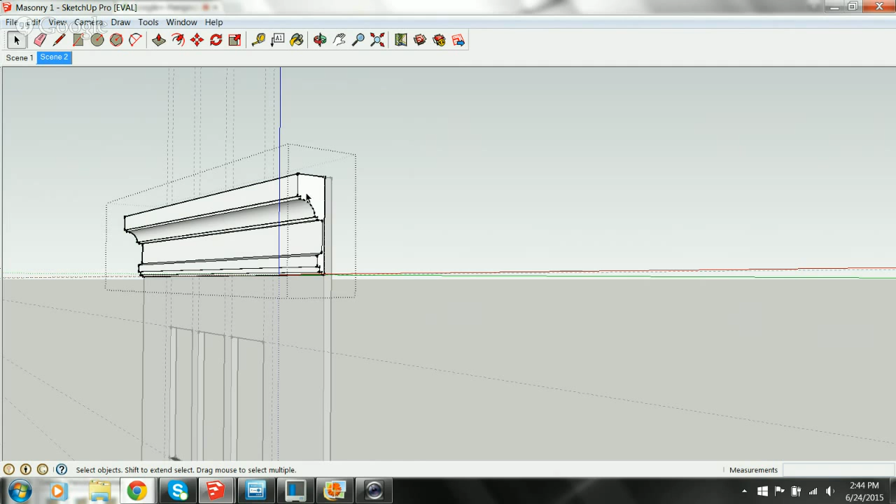All right, so we have the parapet piece that we based on this rudimentary profile I just threw together, kind of knowing what those dimensions would approximately be. Last time I was saying, look at the picture while I'm talking to you. Well, I'll keep the picture up, but it'll slide away when I jump back into SketchUp, and I'll keep bringing it back up as we point to things. Today what I thought we'd do is go into just our parapet piece and start looking at this.

We've got a whole row of what we call dentil molding. That's in here, that's a detail. We have these little decorative nubs that are details, and then we've got some recesses that are all details in here too. All of that is real simple and easy to model if you keep things within a simple geometry. Part of the layout with the dimensions helps us get that, and I like to keep things in dimensions of 4s if possible, most of the time.

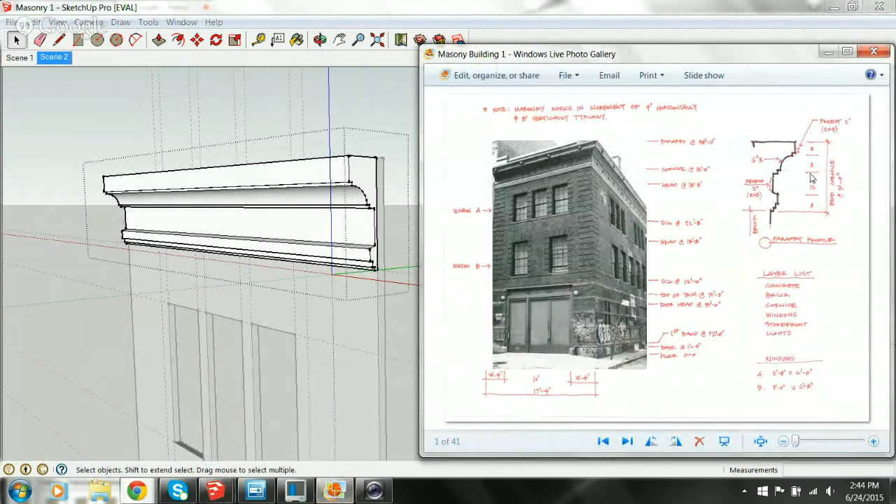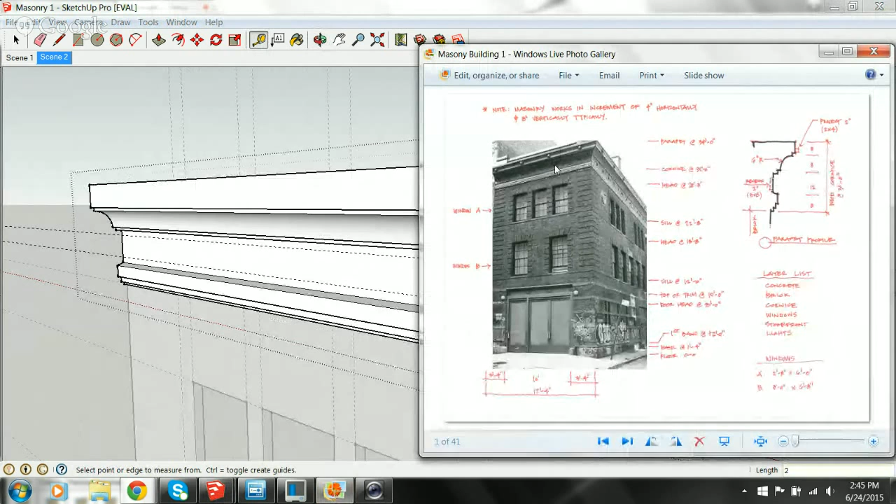Okay, so if I come over and I start, this was 1 foot is what we have to work with. So let's start with our recesses in here. I'm gonna grab that one and come off 2 inches, grab this one here, 2 inches. What I'm doing is setting a boundary around the outside of this particular level of the parapet to give me guidelines for these recesses.

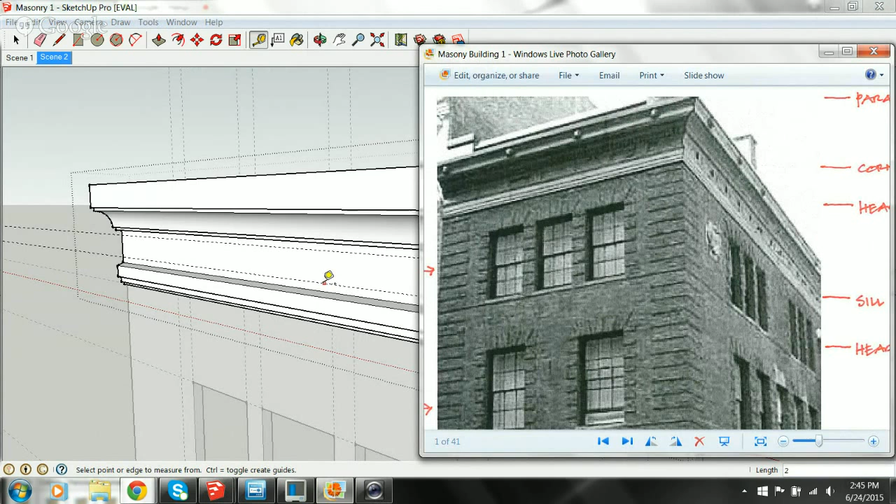So 2 inches there. We'll go ahead and just for right now, pull 2 inches off each side. Now I've got a boundary around the whole thing.

Okay, now I do have these lines down here. Remember how we laid all that out? And they were set dimensions. That was 4 feet, and let's see, these were 2'8". So I'm going to come over here, because I want some of these indentions to line up right on the centers of these. So 4 feet, 2'8".

Come on, grab it. Come on, grab it. Not going to do it for me. Why? There we go.

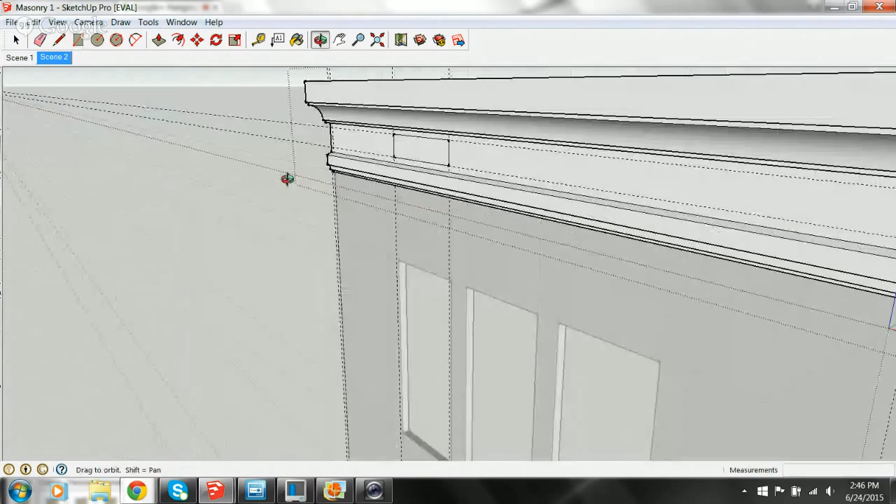Okay, and then I'm going to draw a rectangle in that. I'm just setting up construction lines for right now, I'm not doing any modeling or anything at this point. Okay, and now these were 8 inches. Oops. Oh, really? It is not.

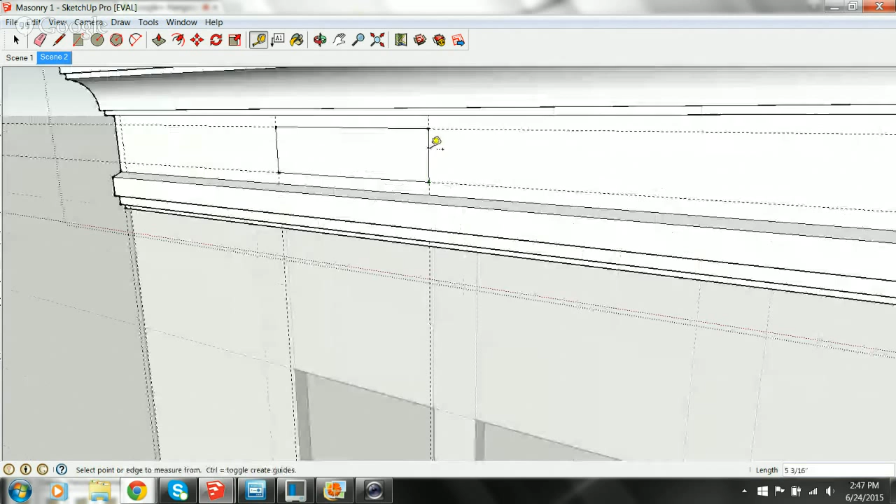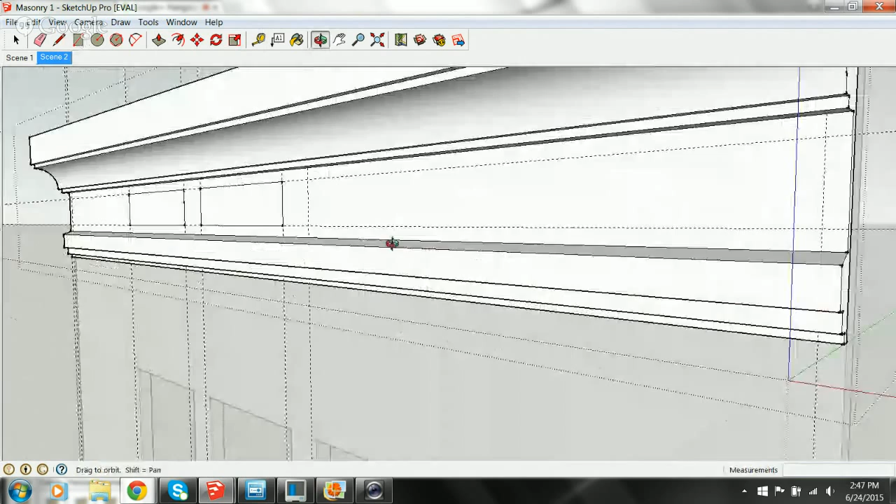So when you're grabbing these lines, you're punching in 8, and it's translating it to 8 inches. Yes, I forget I'm supposed to be providing instructional information as we go here. It's okay, these people are supposed to go through part 1, part 2, part 3.

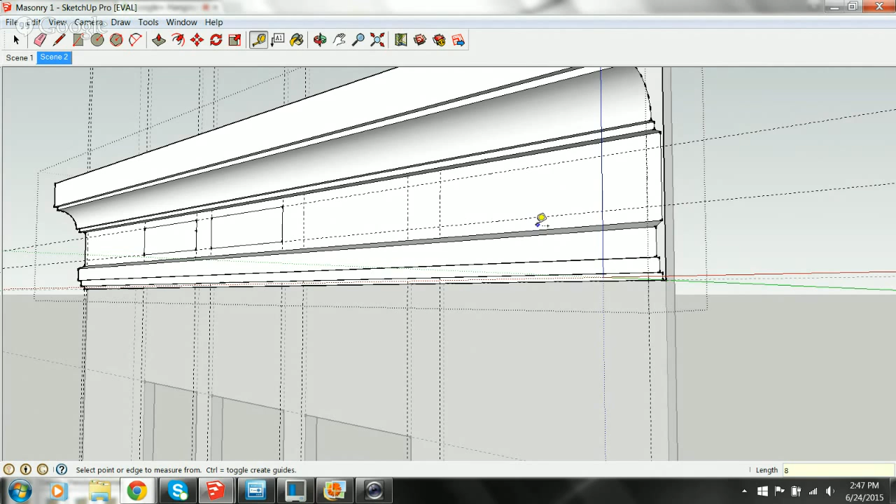What I'm doing is grabbing the line, and in the bottom right-hand corner you have the little length tab. I'm just typing it in because by default it automatically types in, and the default is inches. If you want, you can type like 1 foot, the foot sign, and the number of inches, but instead of 2'8", I'm just hitting 32 inches. Then I'm giving myself the guidelines to start setting all this stuff up. You put an extra 8 inches on the end.

Oh, I did, didn't I? So I just take that. That's why I have people watching as part of the instruction - when you catch the errors, that means I'm doing a great job providing instruction.

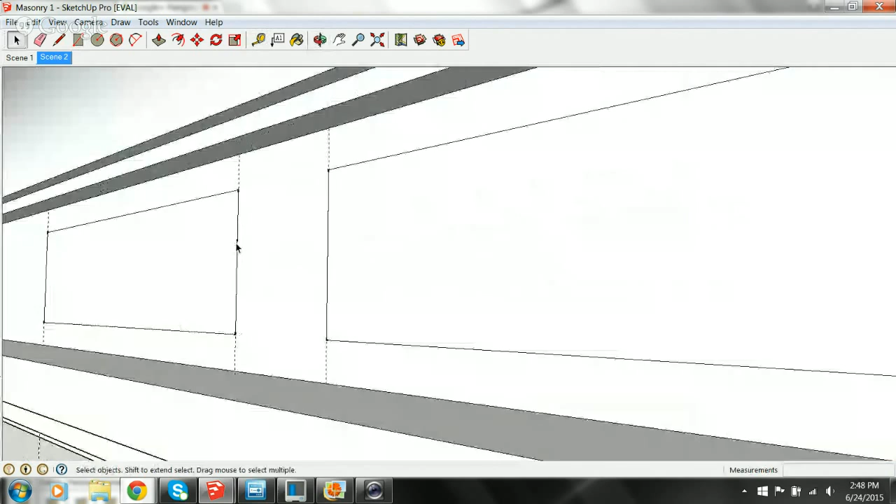How's that? Okay, so now I have 3 here, and I have 4 feet out here. Actually, if I offset that 8 and went 32, I'd be pretty close to having 5 equal. So I am going to go ahead and do that just for the sake of the construction lines, and then I'll know I have 5 equal.

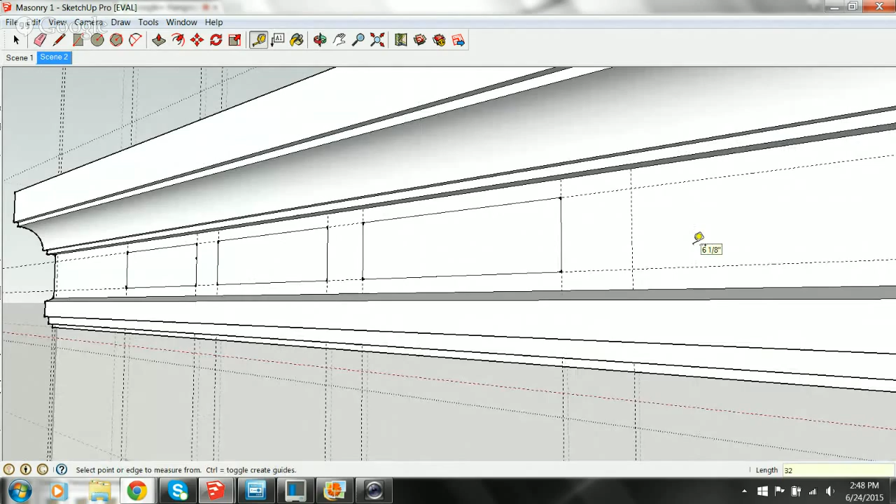It's really not wanting to grab these lines for me today. So there's that one - is it because the space is so short? No, I think it has to do with as soon as I draw an entity like a rectangle or a line, it doesn't want to grab from that line of a rectangle for some reason.

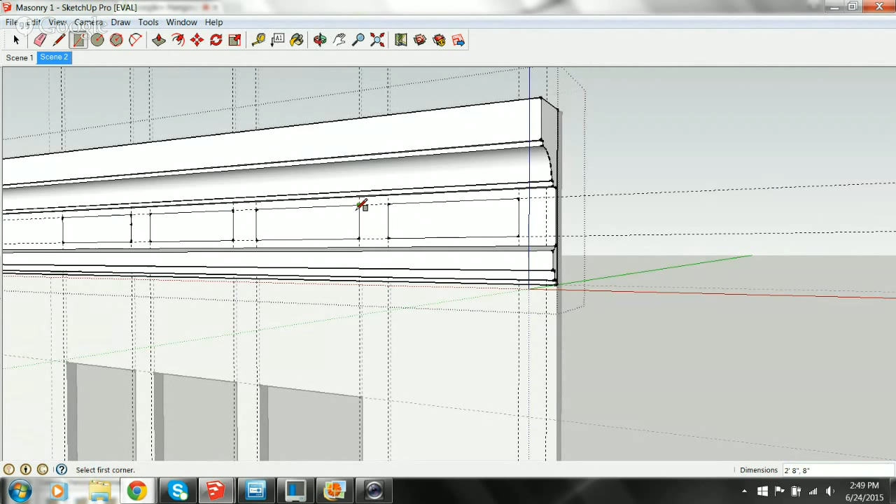If I hit right on a grip point like a midpoint or an end, I got to find the in-between, like that little red box, and then it tends to do a little bit better. So I'm using that tape measure toolbar just to grab it - I click on the line, hit the left button, and then drag it over. I type 8 inches. Okay, so I'm down here, little red box, click, type 32, rectangle button.

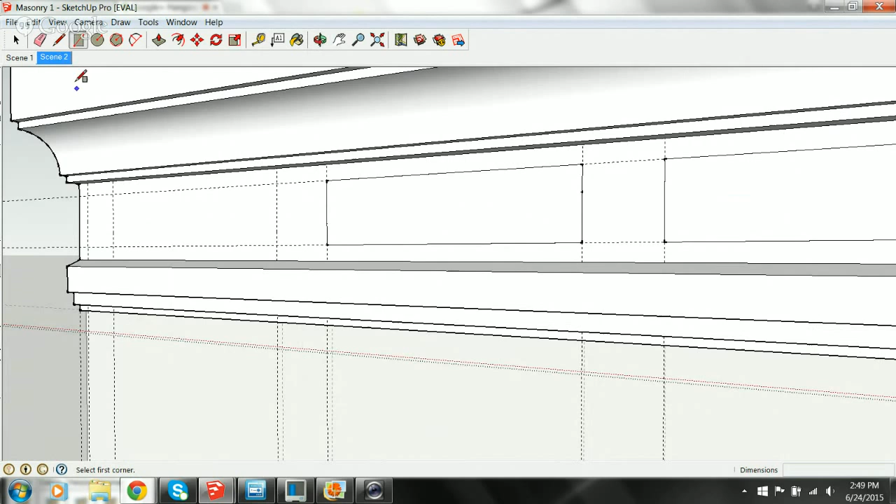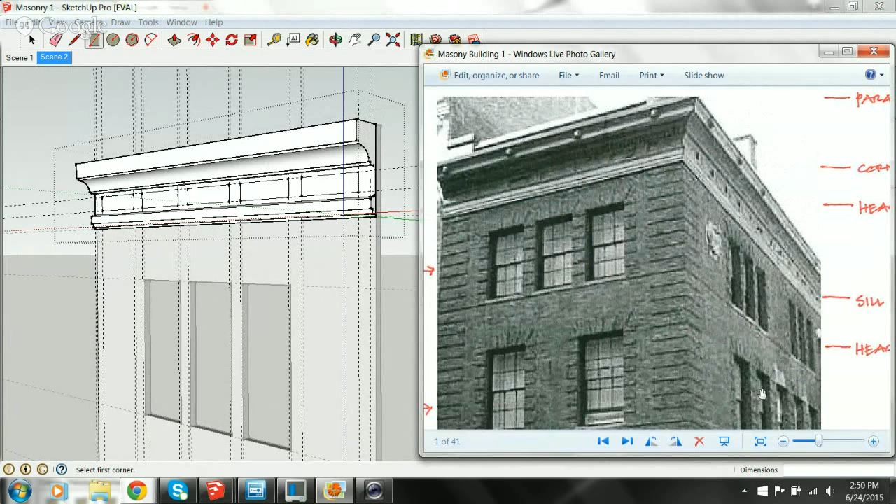There. So now, just for the sake of our artistic license, I've got some areas that are divided into fifths across the front of this facade. If you're only going to deal with the one facade and not create a 3 or 4 sided building, it's a whole lot easier. If I was to turn the corner with this and down this whole side, then I'd work in modules of this 3 that you can kind of see in the picture.

This module of 3 translates to what we're modeling here. Now keep in mind, everything I'm doing was in the parapet - I'm not outside of it, so I can't click on any of those individually. I'm within this group, and that way I'm not messing up any of the rest of my model.

Just want you to notice that even when this is all 3-dimensional and I'm drawing in this, you can still do push and pull, and it will limit it. You'll be able to see right there, which is the first line - it's always going to default and limit to something that you've drawn within the model.

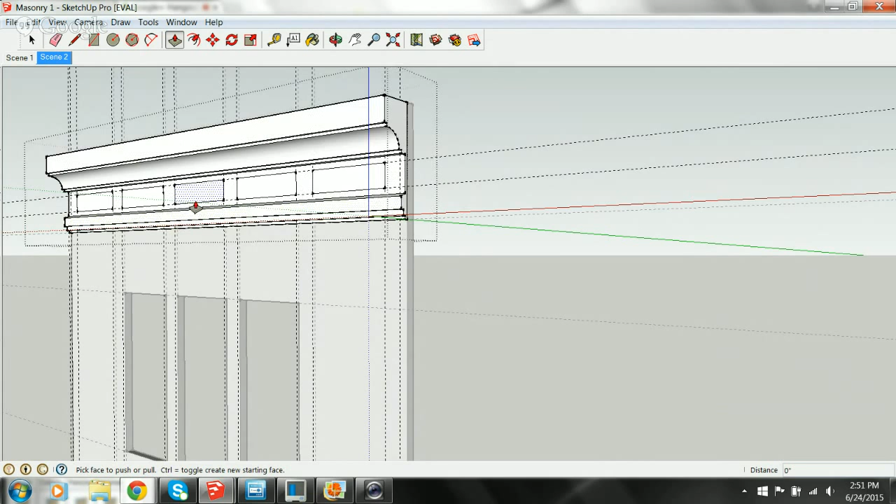Okay, so I stopped it there, but I can grab it again and go further, but I don't want to do that. So I'm just pointing out that you can still do all that manipulation. Say you want to change something, because we're going to do that once we get up here and we're getting ready to do that into here.

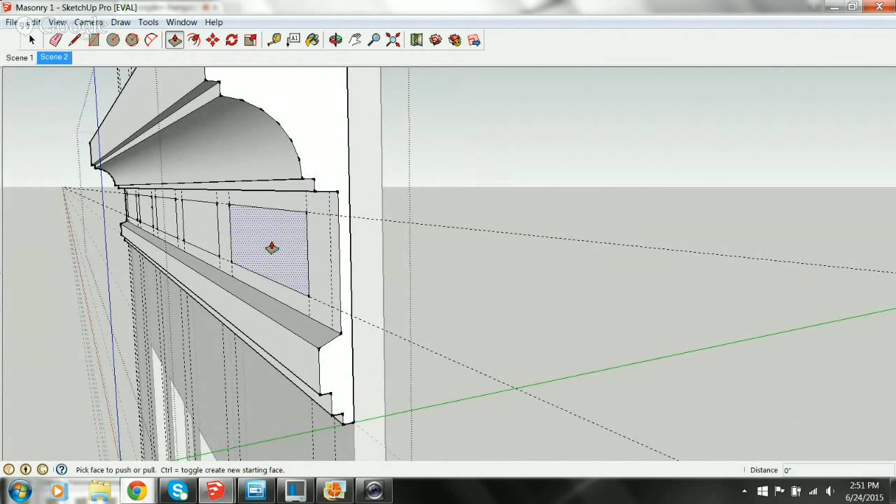Now, the one thing that I didn't take into account when I built this last time was the thickness of this piece right here and how it would print in Shapeways, because right now I set this as the minimum thickness that I can print successfully. But I'm getting ready to push and pull within that, which is going to create little errors in their checklist. So in theory, what we would do - well, I'll just do it - we're going to get out of that, and we're going to change our masonry layer.

And we're going to drop this down to the bottom of our parapet. And now I'm going to take the parapet, get back into that group, and thicken that up to the thickness of our wall.

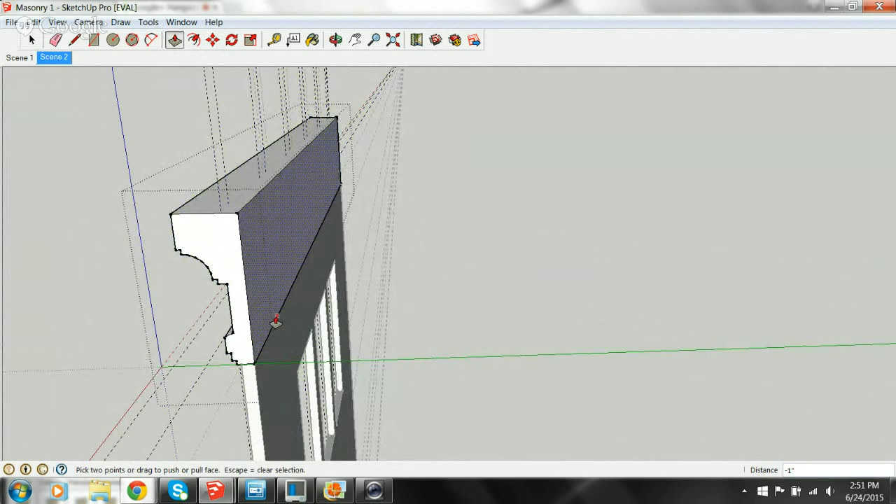Okay, so now I've got the extra thickness here to work with, and I've got one piece here and one piece here. In the grand scheme of things, it made it a whole lot easier on the Shapeways check system. And here becomes your glue joint if you want to build this model in separate pieces. Okay, so now what I'm going to do is come back to my image real quick.

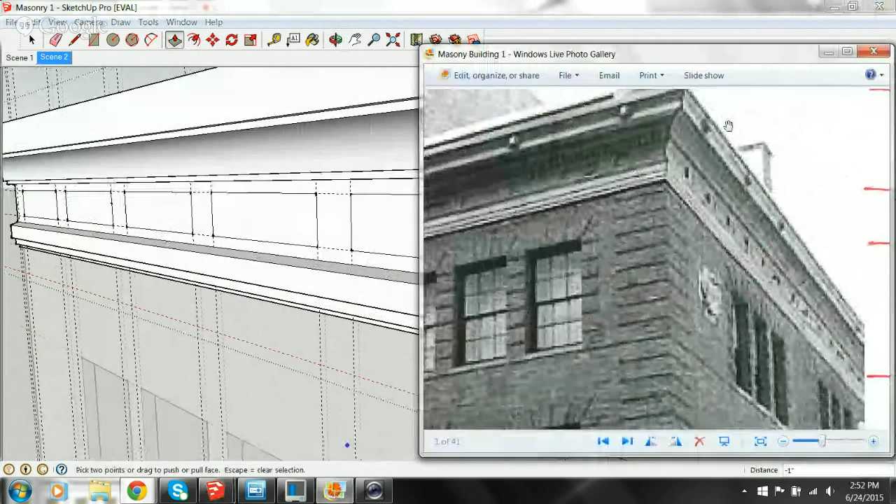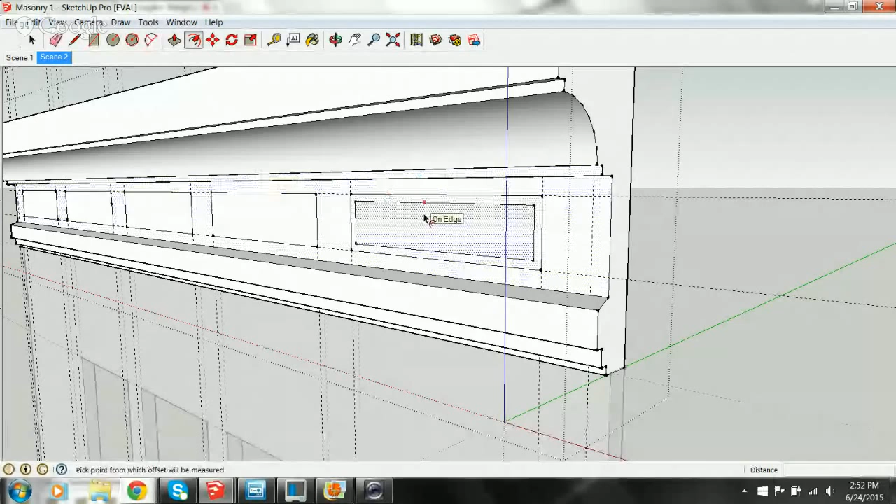I have no idea what the detail is in these, so this is where you get to pick what you want to do. I'm going to say, well, they probably, it's out of wood, so I come up here to my tools, to my offset. I'll grab, you'll see on the edge, it's recognized this rectangle. If I come up here, it'll recognize the larger rectangle around the whole piece. I want to work here, so I'm going to offset this an inch, just to give myself a little extra relief. I'm going to do all these at the same time just for the ease of working within the groups of commands.

Because if I click on it while I'm active in the command, it just saves time. So now I'm going to go to push-pull, and I highlight the area that I want to push, click on it, and push it in. We'll say 2. That went in. Now I grab this outside area, I want to push it in. We'll just say 1. Okay, so now we've created some 3-dimensional relief.

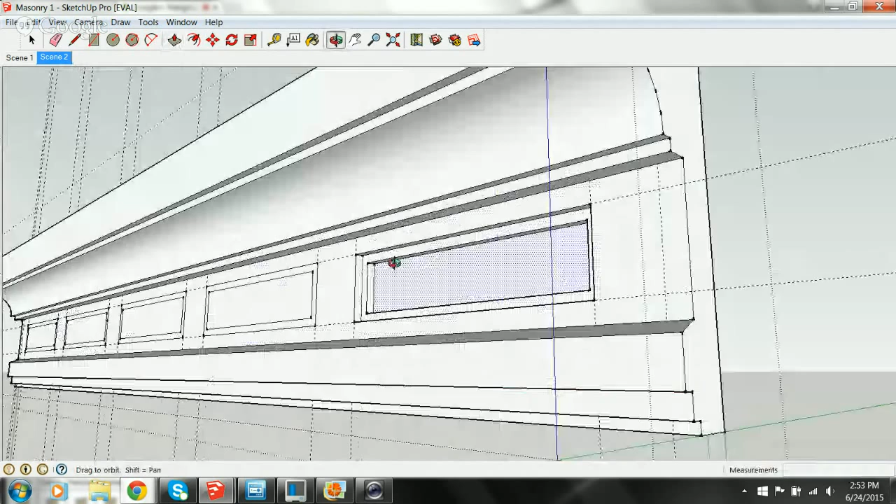Real fast on the front of this facade. Yeah, the goal is fast. If you're going to work in SketchUp and try, for those guys out there like Kent, and I guess maybe Ed's probably printing stuff on Shapeways and selling it too. Kent's doing a fantastic job with his machinery stuff, and you've got to be able to be somewhat quicker, or you're going to be kicking yourself and not making money.

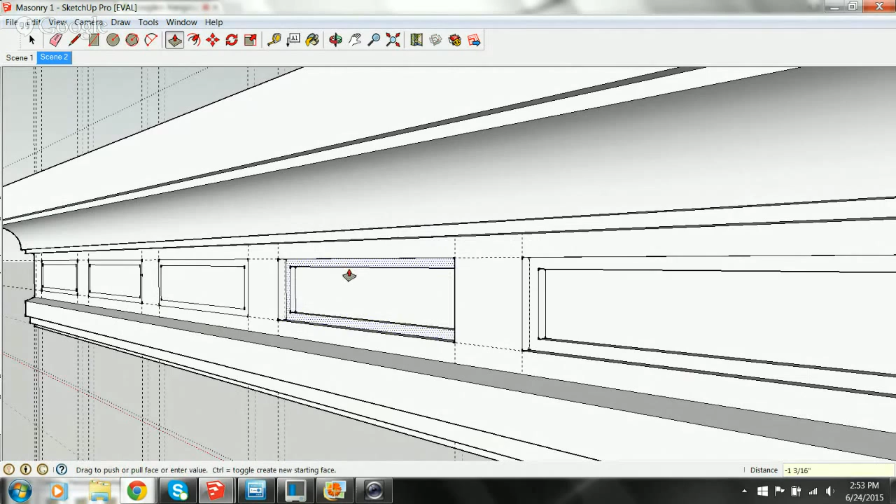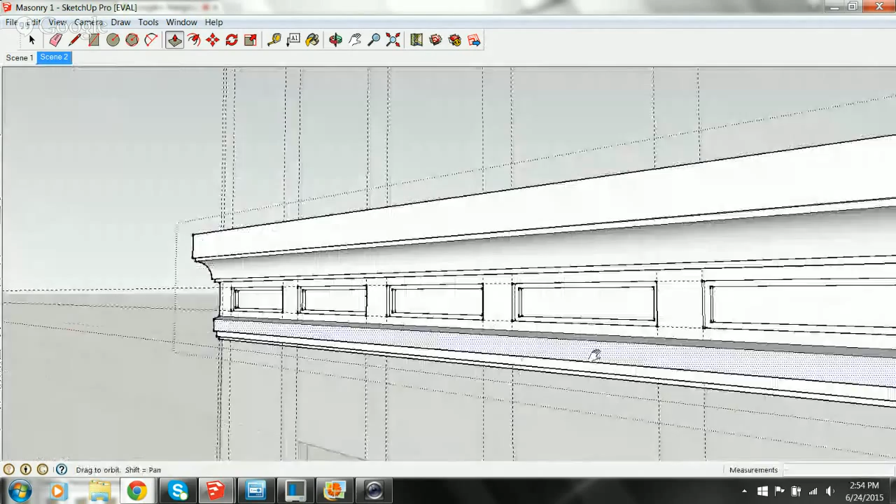I'm just doing it because I thought it'd be cool to embark down this path with you, and if we end up printing this out and seeing how it all tests through the FUD product, I'm finding the white strong and flexible isn't nearly as good as I thought it was going to be. It's beginning to be old school. Some of the stuff I originally did, like bar stools and benches, people have bought, and now I've got like a 50-50 mixed review of it not printing successfully. Mine came out fine, but that was just mine. Well, expectations are being raised every year.

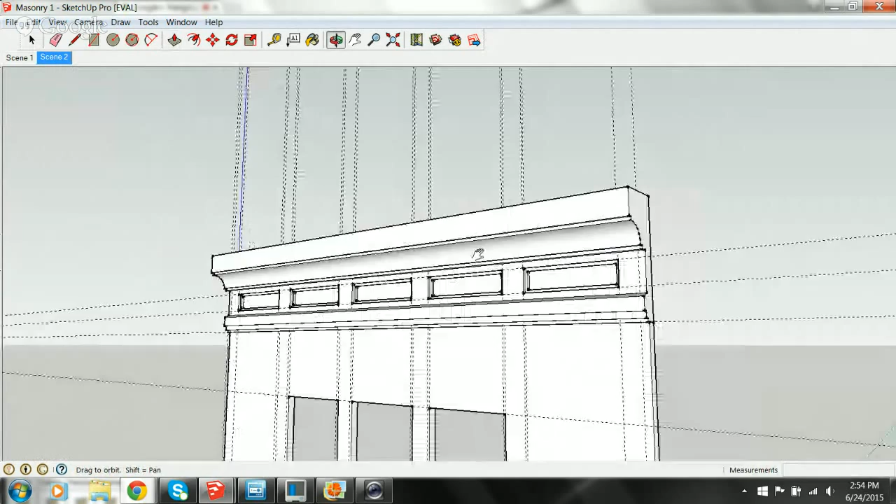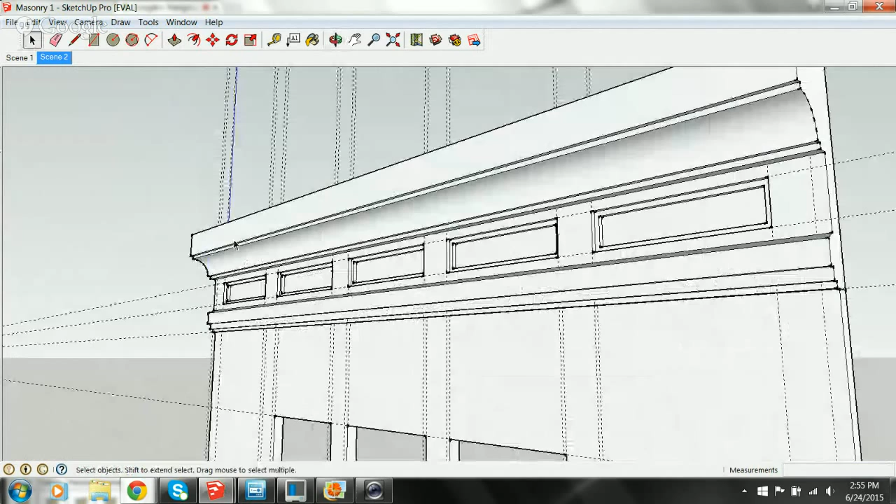So now I've got a nice detailed wood parapet with millwork and moldings that at this scale, there's no sense in beveling and curving these edges. For crying out loud, by the time you put a coat of paint on it, you've already rounded the edge. So that, from my perspective, adds a nice level of relief and detail to a flat area of a parapet. Okay, now I've got another one up here that has similar, but this is where we had our bump-outs.

So now I look at it and say, okay, well, it was easy enough to divide this into fifths. That works symmetrically with the plan. This one, there's only 4. I want to stay somewhat true to what we have going on here, and I only want to do 4.

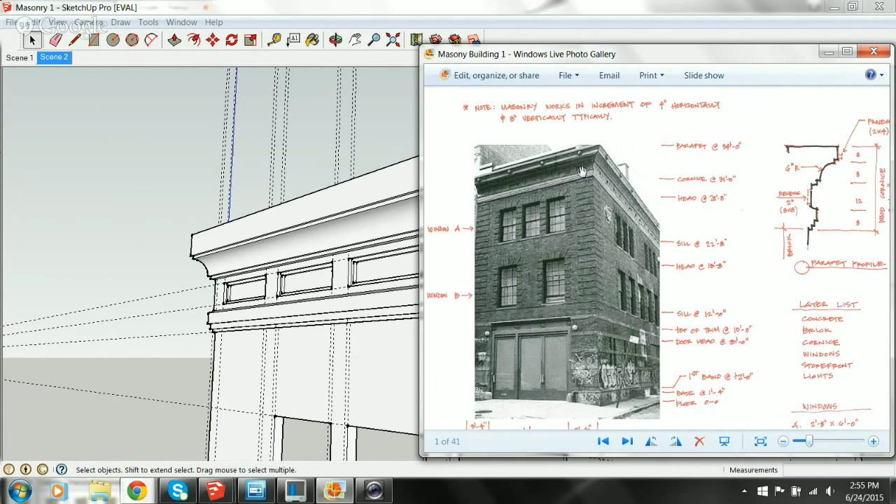So now I'm working something out on the ends, and it looks like these, if I follow the natural path, might line up on the masonry in between the windows, or maybe a little outside of it, because it looks like they're fairly equal spaced here. I'd agree with that. But I don't know what this dimension is out here, and I don't know what this dimension is here, so we'll fake it. We're going to come back into our group, new guidelines, and start with 12 from either end.

I'm going to go ahead and erase some of these others that were from the other one. We don't need those anymore. It starts to get confusing. For those that don't do SketchUp, I don't want it any more confusing than it already is.

Okay, so let's see what my distance is between these two, just so I can try to be somewhat accurate. 15'4", so I have 3 equal spaces of 15'4". So what is that, 5 feet, 1 and something inches? But we're not going to get that technical, we're just going to go 5 feet.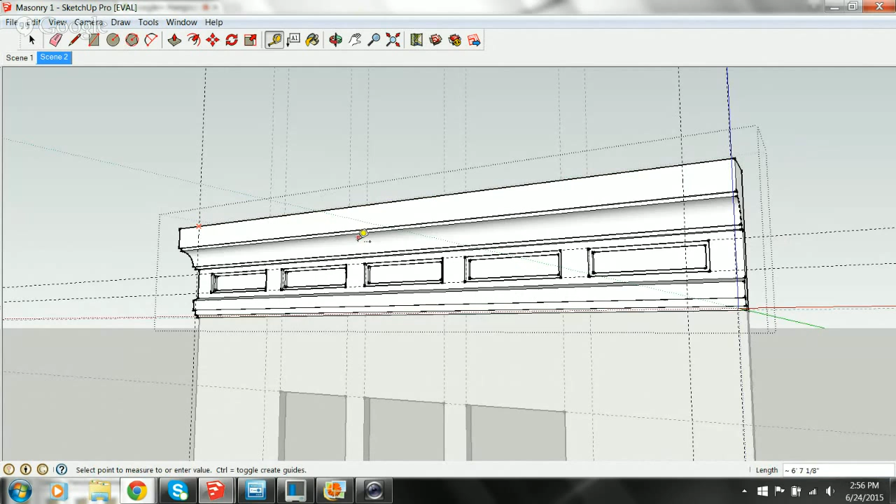60. Didn't grab it, here I am again. 60 from that side, 60 from that side. Okay, so now I've got center lines of where I'm going to drop these 4 rectangles.

Perfect, just kind of similar to the other one, I've got 8 inches. So how about we just go with 4x4s for this. 2 off the top, 2 off the bottom, I already have one guideline here. 2, 2, and I'm going to draw a rectangle.

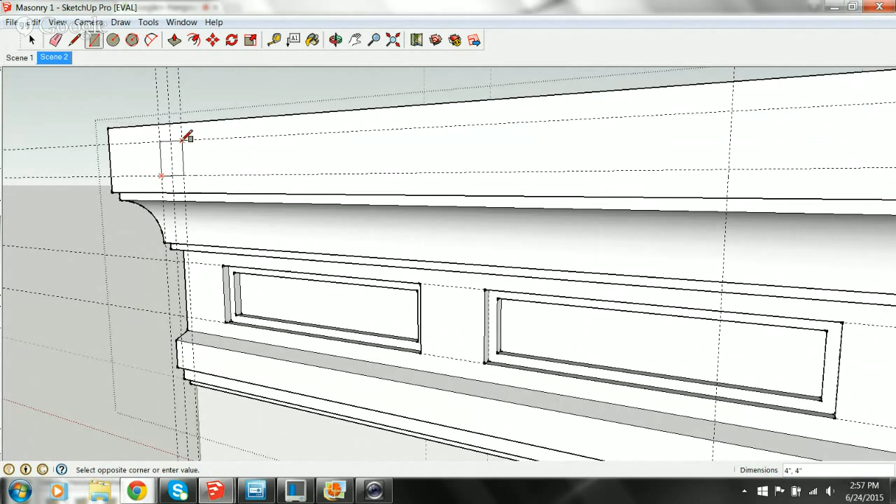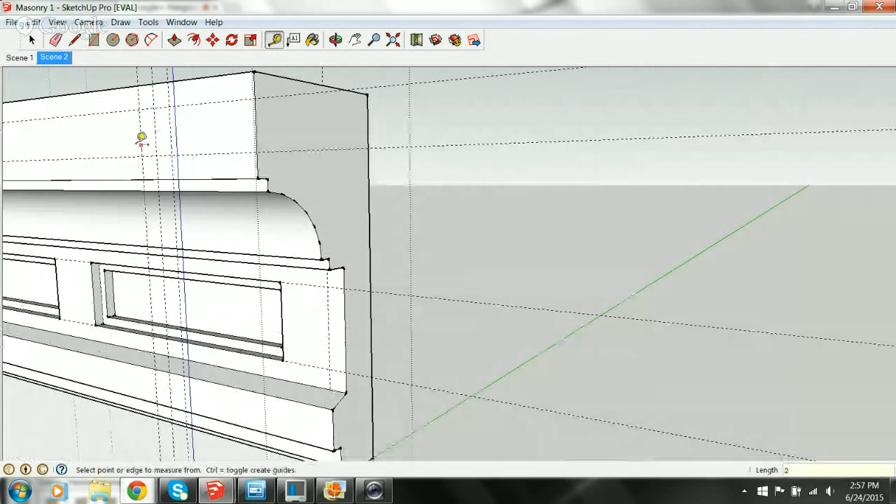Okay, yep, so carry that out and do the same across. You can knock these out pretty quick. I'm just going in, grabbing them with that tape measure and offsetting to give myself those guidelines, and then hit all my rectangles. I use shift and the middle mouse button to pan across like that real quick.

Okay, so now I've got my 4 detail accents up top. Yeah, grab my push-pull there. Let's make these 2 inches because we're going to add a little bit extra to these for some relief again.

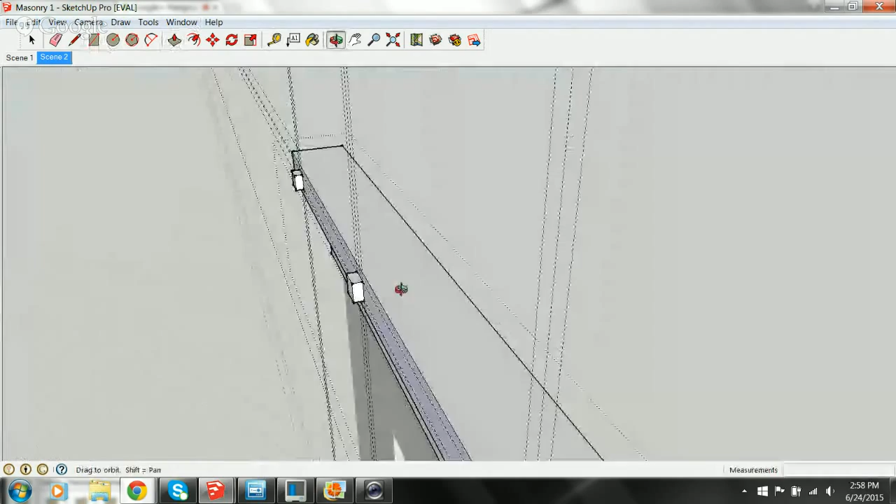That one didn't come out 2, try it again, 2. That does not... it doesn't look like it, but it's 2. We trust the computer when we're in doubt. Perspective is what makes it look weird, eh? Yeah, all right, so now I've got the base concrete.

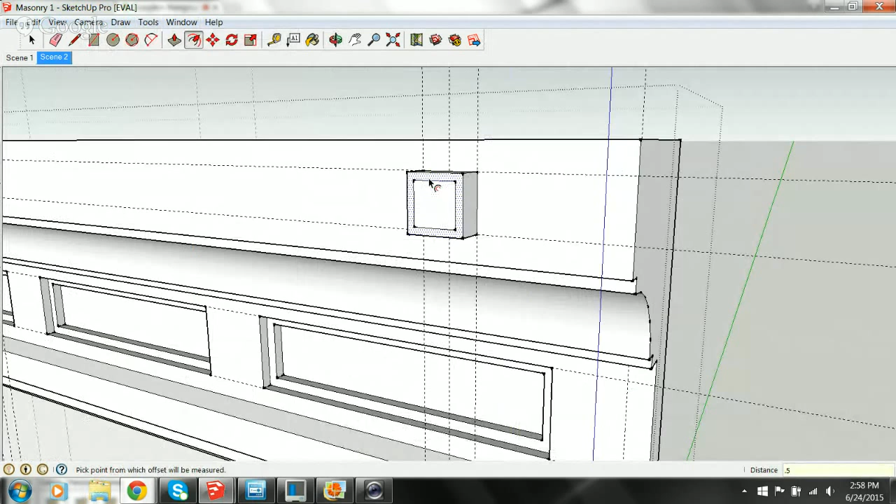Well, that looks kind of big and bulky, right? Well, let's go back and use our tools, our offset command. Now we're out here at this face, we'll offset that, we'll just call it a 1/2 inch. Go back to our push-pull, and we'll push that in. Let's say 0.75, 3/4 of an inch.

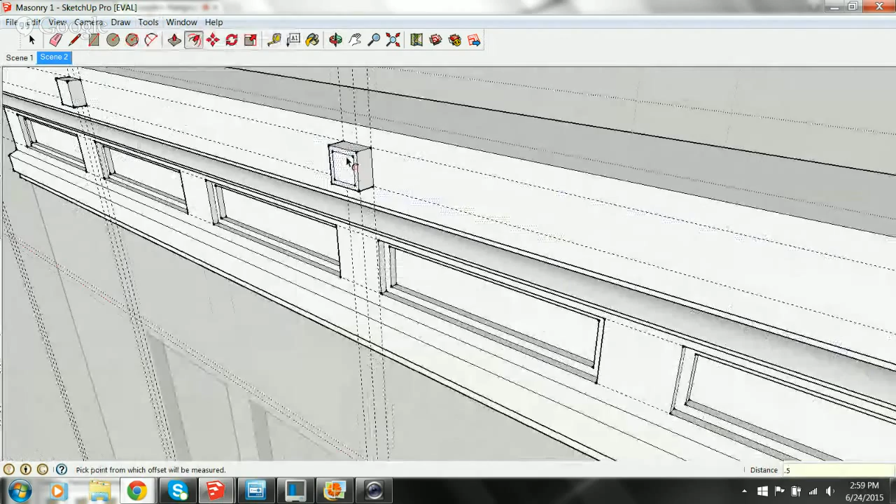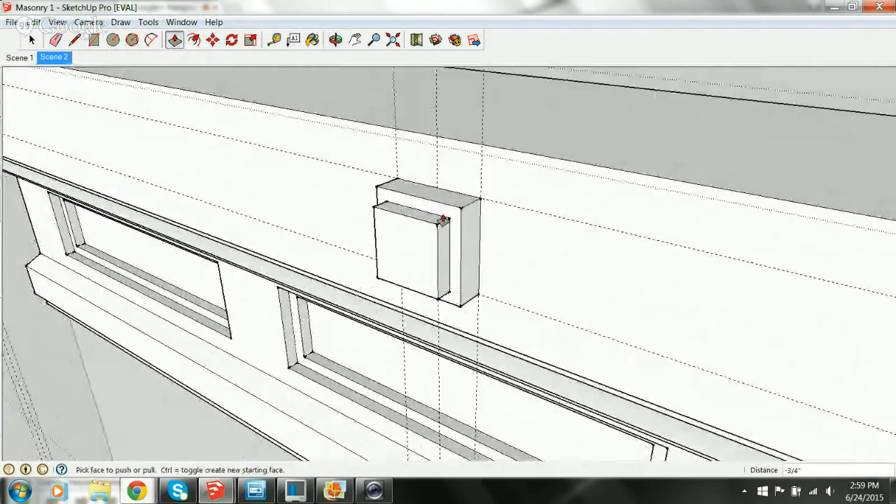And if we do the same with the rest of these, what did I say, 1/2 inch across all these. And again, I kind of point to the middle of these boxes, and then automatically that red box is grabbing the outside edge, type 0.5. Push pull, grabbing, waiting for the highlighted box, 0.75. 0.75. Oh, I got one more.

0.75. Now, folks, you have the parapet to what we are affectionately calling the fake Ghostbusters building. And is it perfect? No. Okay, but how long have we spent here? 15 minutes maybe? Yeah, and we have a parapet designed that you can drop on top of any building.

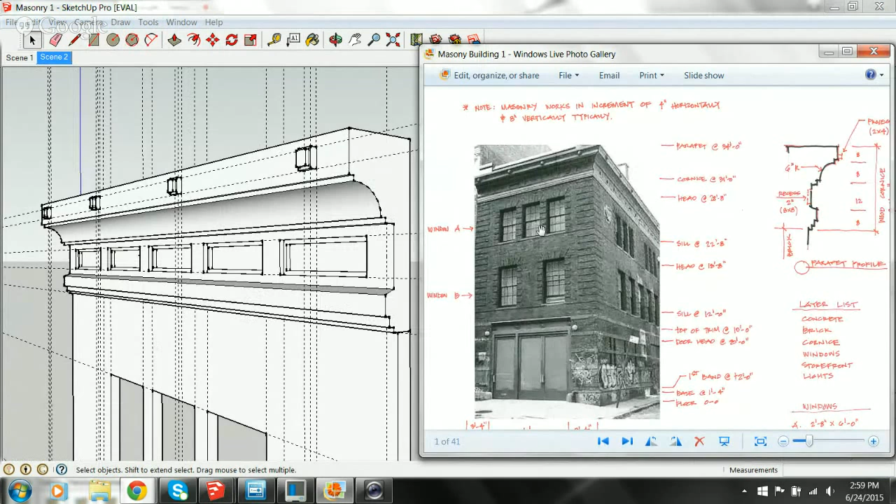Yeah, exactly. The way I just set this up as a block, I can export this group out and tie it into several. And that's kind of where I was going to go with the next 5-10 minutes here, keeping the segments short.

But I'll just take this and select it, edit, copy, and then I'll go edit, paste in place. Now the reason I've made a habit of paste in place is architecturally I get pretty anal with how things are moving around. I don't like to just try and copy, paste, and guess. When it's pasted in place, I have 2 exact duplicate copies, or 1 duplicate copy on top of the original.

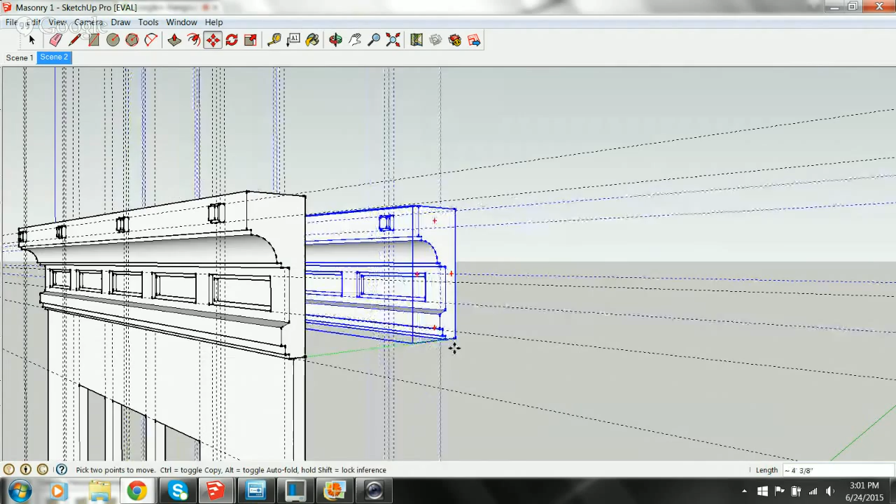Right here, I grab my move button. I come in here to an exact point, and then I'll zoom back out, and I'll move it on an axis that's in line, so that when I get into setting this up for Shapeways, I have things lined up to just create a sprue that connects them all together to keep my box as small as possible, because you have to deal with the maximum size on each one. Yeah, with what each FDM is, it's even worse on how much you can print.

But so then if I grab this, I'm going to go flip along. And sometimes I have to guess because I wasn't paying attention. I think it's the red. Nope.

Oops, yeah don't ignore the error. Oh, come on.

There, okay. Flip along, green, flips it to the other side. Now I've got...

Continue on, I have a family thing here. So, all right, I'll keep going and I'll keep chatting and you're just gonna have to catch up.

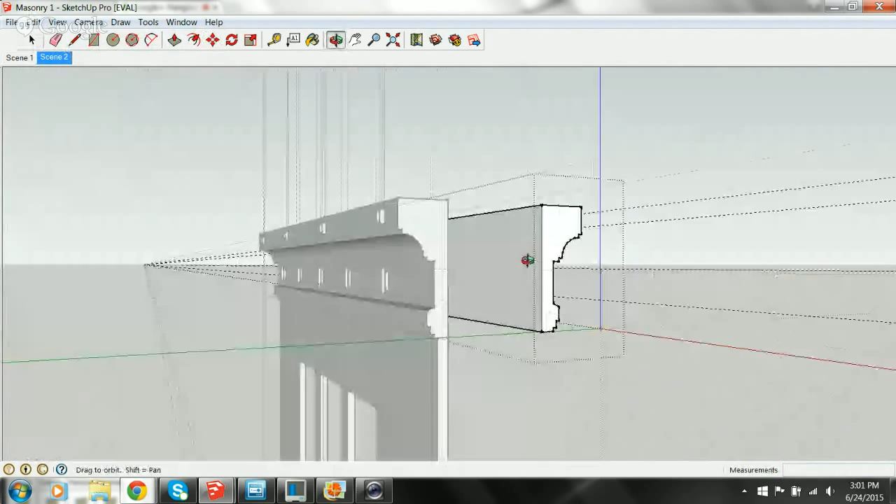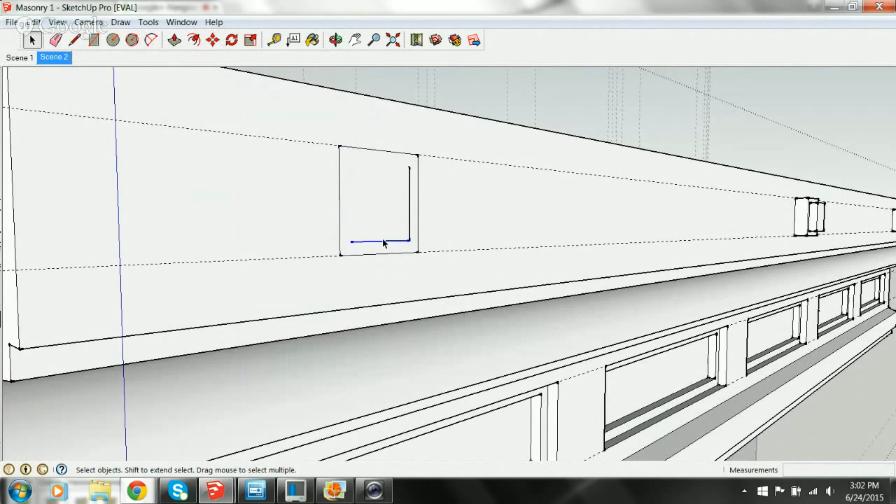Okay, good. So what I'm gonna do here is now that I have this parapet style A on this side, we're gonna create a little bit of a different style. I don't particularly care to have this as an option, so we're gonna get rid of these by using the push-pull, grabbing them, going back to flush. Then I'll select the rectangles or the lines independently and delete them so I'm not destroying the geometry of the model, per se, but keeping the geometry intact because I'm going to do a different parapet on this side. See if I just grab this and delete it.

It worked. So I spoke against my own understanding here. You just grab them — I circled around them from left to right, highlight them, and deleted them. So now on the top here, we went 2 inches in.

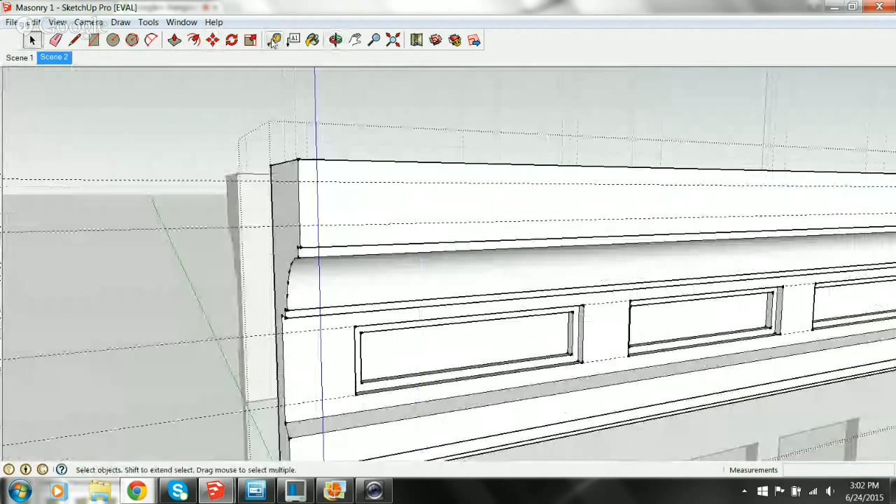I'm going to go ahead and set up a couple more lines here, and we'll just go 2 inches on this one, 2 inches on this one. I want to have a nice big, deep reveal on this parapet as you're modeling here, and we're going to set that in 2 inches.

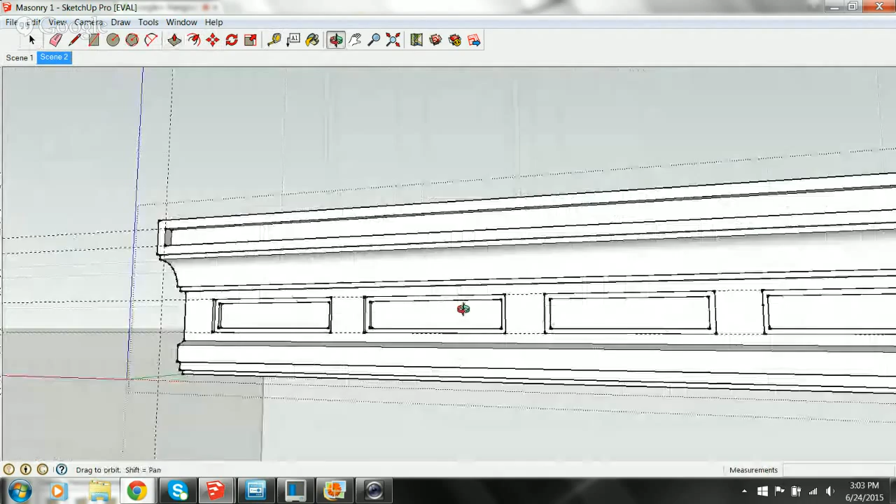Now I've got a pretty good sized detail up top that you can add as an accent color in your model if you wanted to. I think we'll even — let's go ahead and add another inch to that, another inch to that. Give it even a little bit more depth up top.

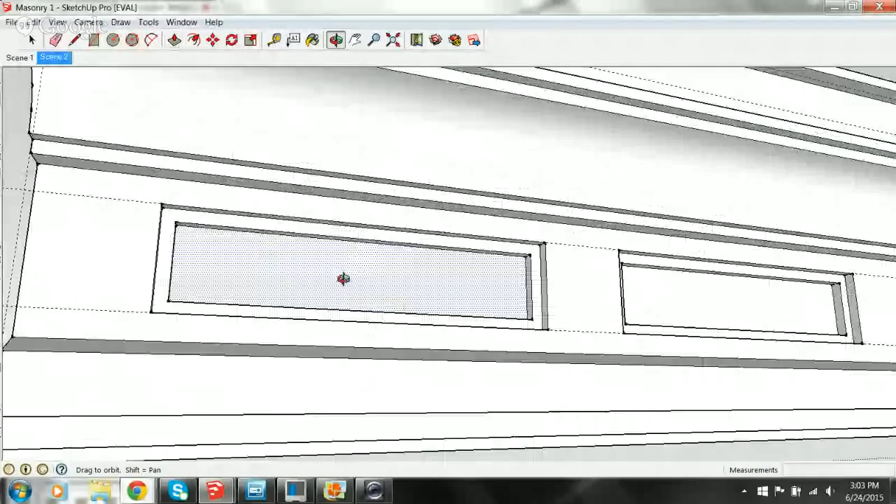Then I'm going to come in on these — I kind of like this pattern, goes well with what's established, but I want to break it up just a little bit more. So I'm going to come in and use the midpoint here and just divide this a little bit more than half. I've got 8 inches in between here, so we're going to go 4.

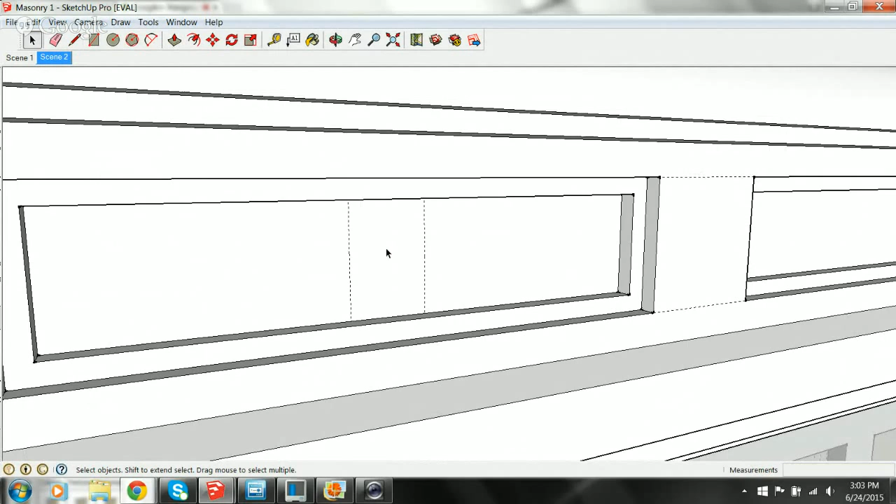So we'll offset this 2 and this 2 so that the geometry in and of itself is consistent with the dimensions we've been working with as a whole on the model. Take that, and now I can select that, and I'm just going to push pull that and bring that out flush. So now I've taken what was an overall...

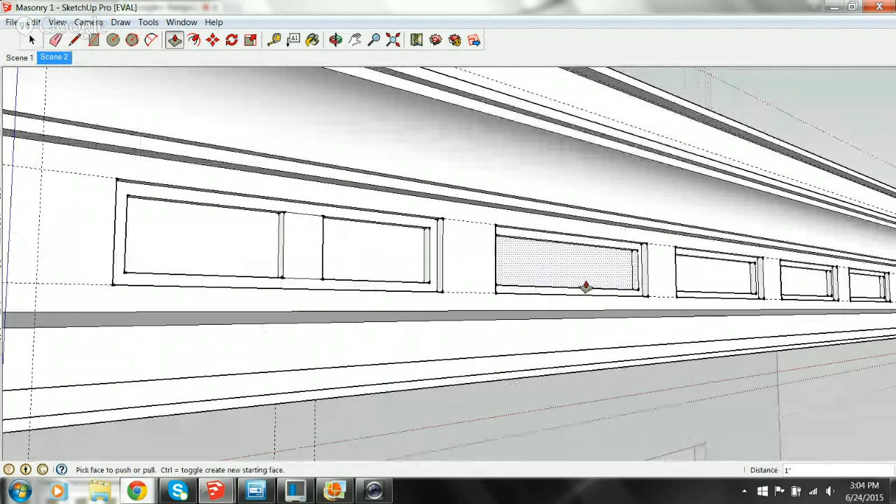But you had to trace that to be able to pull it out, though. Yeah, well what I did was I'm just setting up — I like to work with construction lines because it's going to snap to the midpoint. You know, you can draw this a couple different ways. I'm using construction lines to offset 2 inches to each side, and then the last one I did with the line tool.

While I'm selecting that line, erasing it. This time I'll just draw a rectangle, kind of like I was doing with the others — there to there. You can use lines and just draw straight down along your guidelines. Now it becomes real instead of a marking.

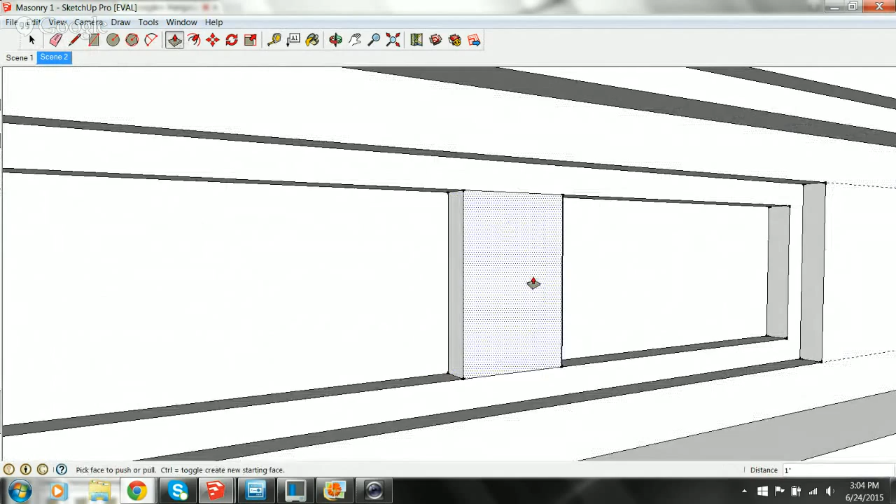Yeah, so what you can see here is I've deleted the bumps up top. I've created an extra recess in the bottom here. And again, this isn't taking too long.

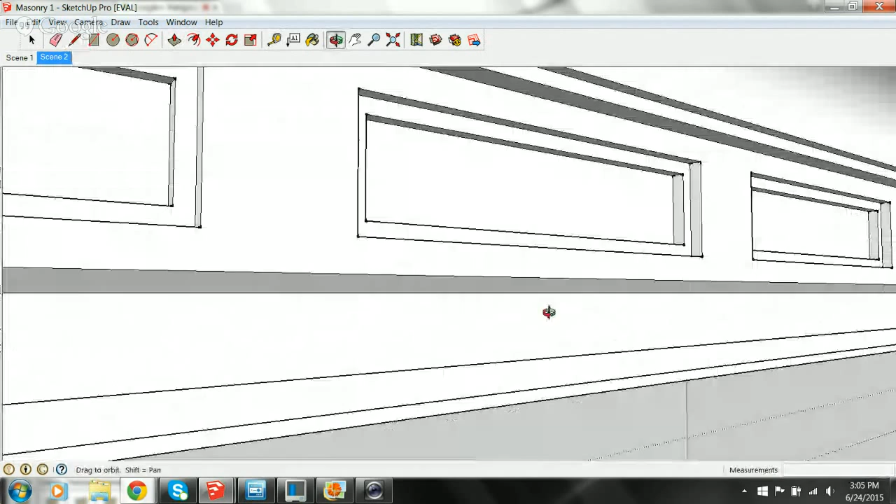You just have to be willing to get in here and mess around with a few things and test what you like. I mean, I do this every day as an architect. I'm always — design is a never-ending process for me, and I'm always doing things like this. Well, maybe if I move it 2 inches, maybe if I move it 4 — well, no, I don't like that at all. So we just erase it, and it's a constant process of drawing, erasing, modeling, sketching, you know.

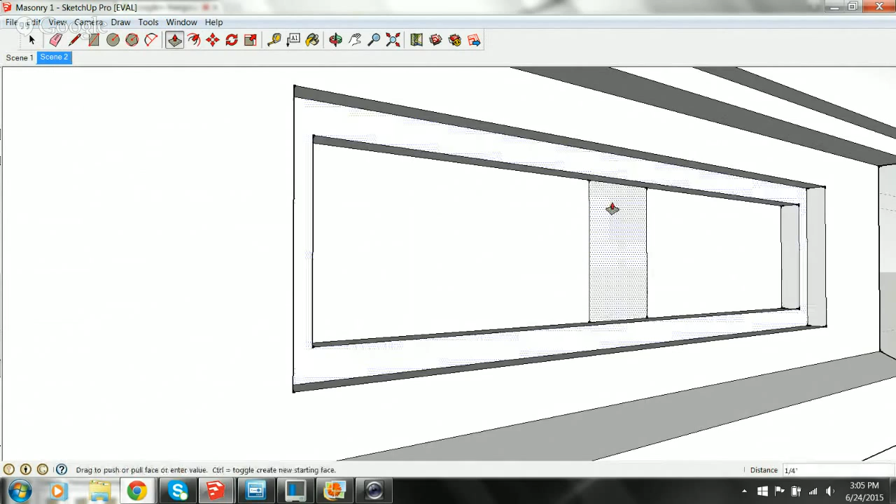Okay, well, how to create a storefront prototype for the model railroad and structures industry.

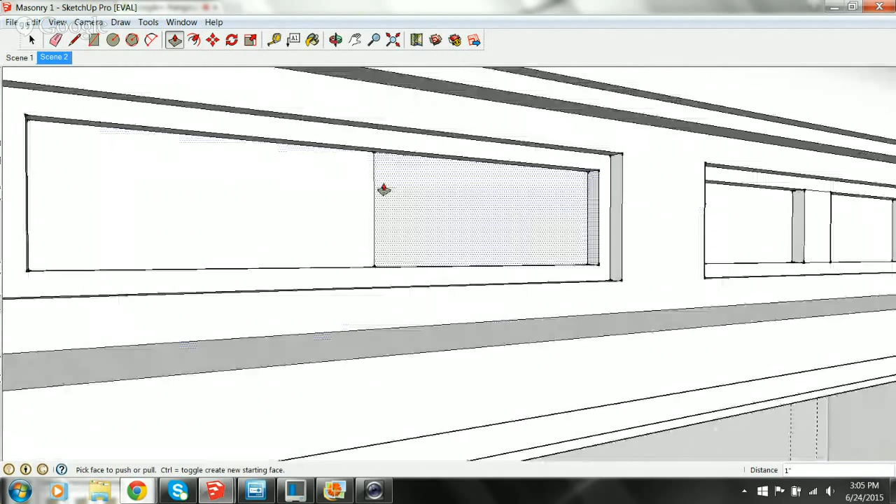Did you like that logo I sent over to you? Yeah, I did. Those are the kind of cartoony versions. I've got some much more elaborate ones coming your way.

Oh, really? But awesome, I was just kicking that around last night. It's kind of like that old school cartoon. Yeah, exactly, you could animate the logo coming in and out, like an old cartoon.

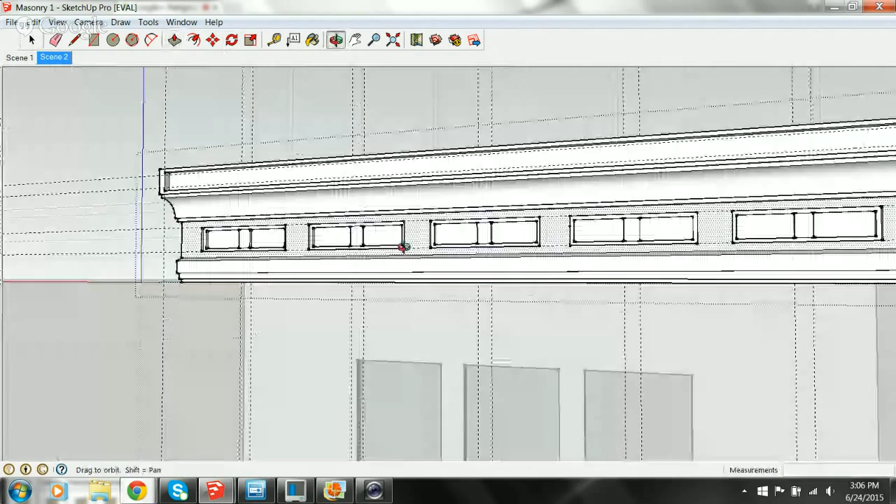Within another 4 to 5 minutes here, Ron has stepped away and addressed all his family issues for the day. We have two totally different, similar but very different parapets.

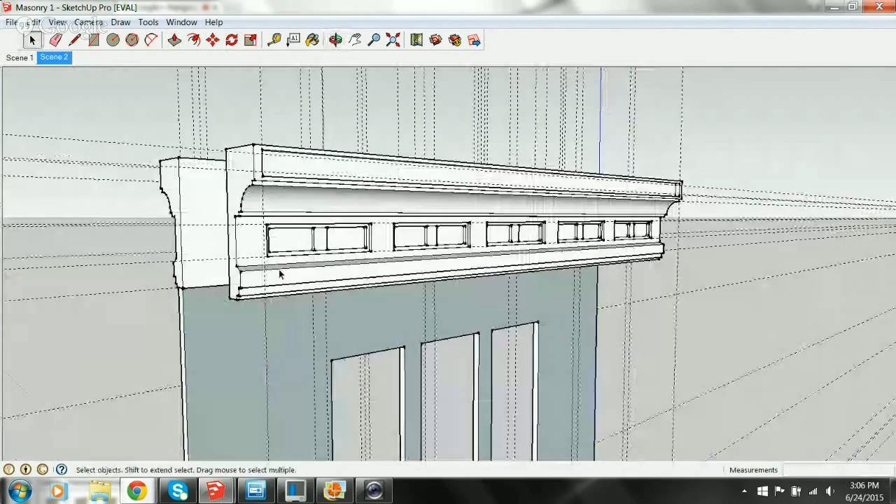It's just a matter of going in and doing something on the modeling side that can be printed, and that's where we need to run some of these through Shapeways and see how much the 3D print detail comes out. These should come out really nice in the FUD product.

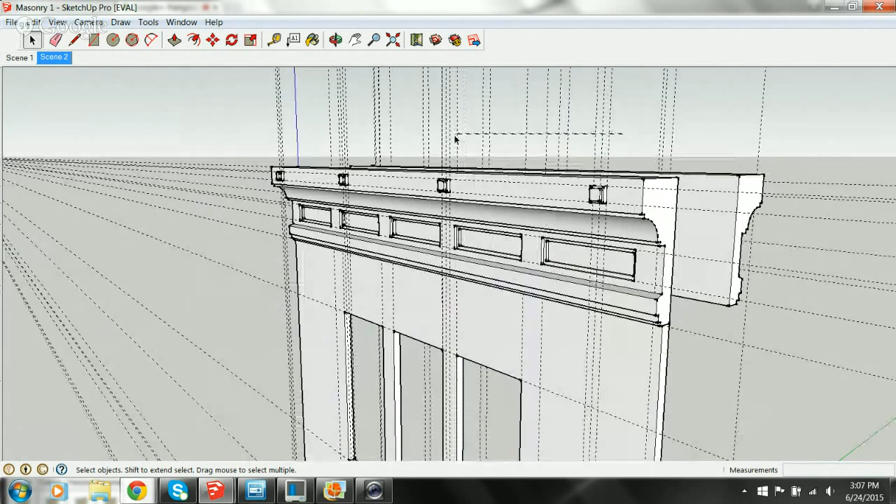It's when we get down to the brick level. Anytime we're dealing with less than 3/4 of an inch in real scale, once I scale that down to HO scale, that's where Kent was saying he's not so sure you're going to be able to get all this stuff to print. So I may send these over to him. I think he has to remodel them, and that's why he maybe hasn't gotten back with me.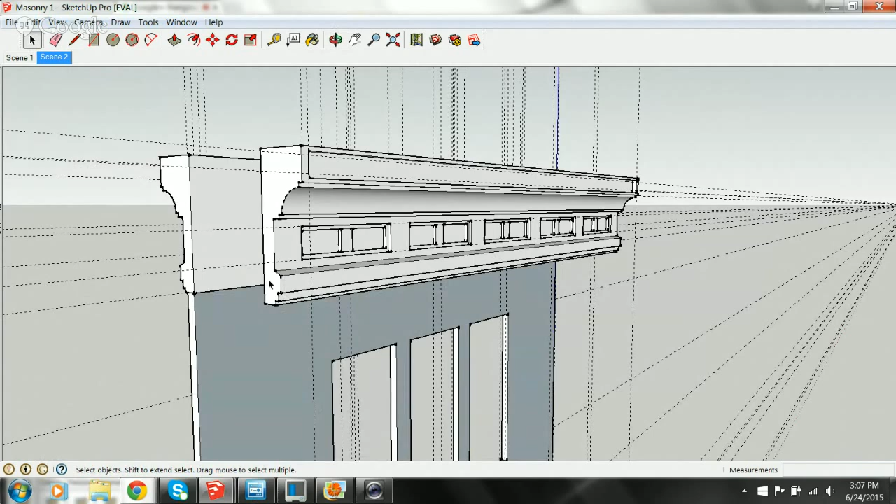That's just within 20, 30 minutes here, we've finished the model for our Ghostbusters building. We've added an additional parapet that can be dropped again on top of a stone wall, brick wall, or stucco wall. So anybody out there modeling in mat board or anything else, you can take a 3D printed parapet, glue it right on top, and have some additional detail without the hassle of having to scratch build that whole piece.

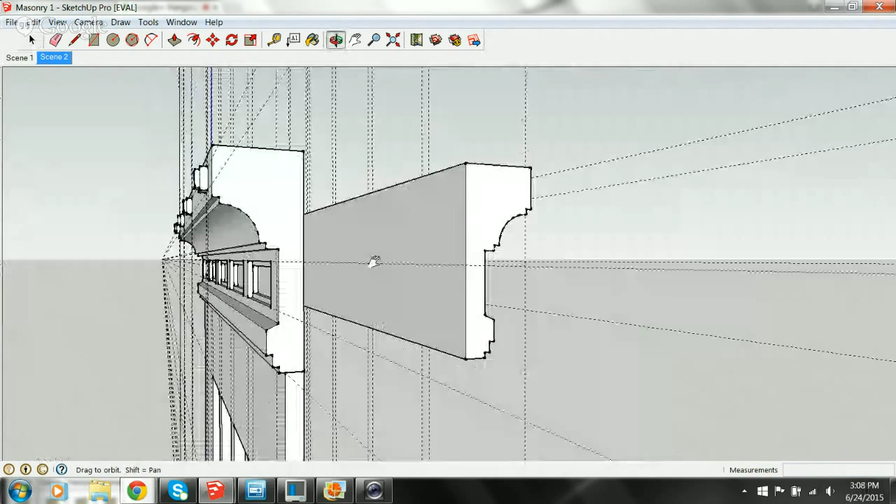So, you still there? Did I lose you? Did I lose you?